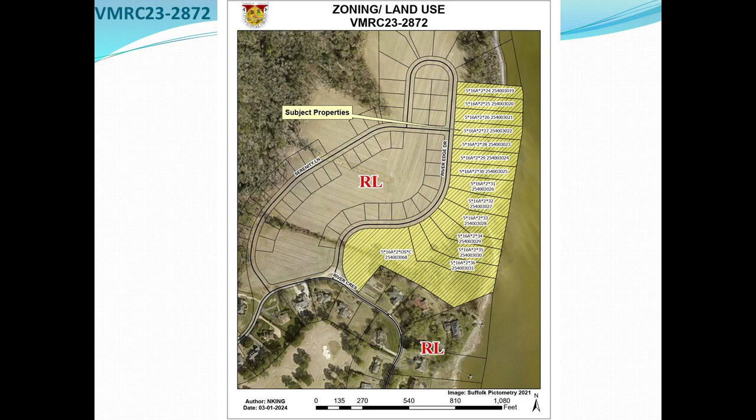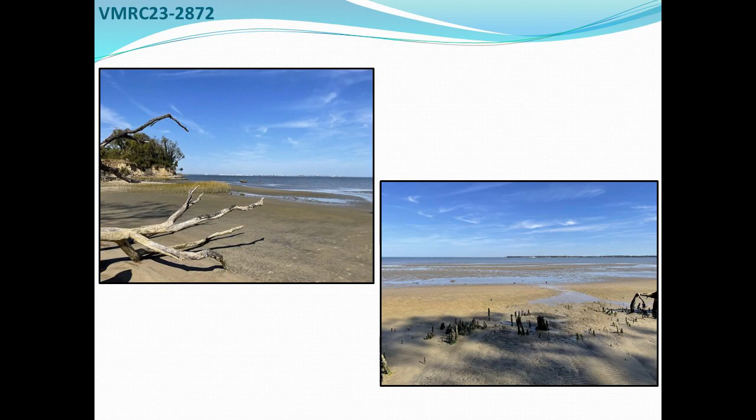The revetment is proposed along the bottom of the bank for 960 linear feet. That revetment is proposed to be there during those hurricane events when a lot of that wave action kind of breaks over those breakwaters and makes it past that, especially during high tide within this area.

Then if you go landward toward the top of the bank, the slope is going to be 3 to 1. That consists of the 100-foot RPA buffer, which is not within this local board's jurisdiction, but the applicant did include that information just to kind of get a general scope of the project. But that will be reestablished fully in accordance with those regulations.

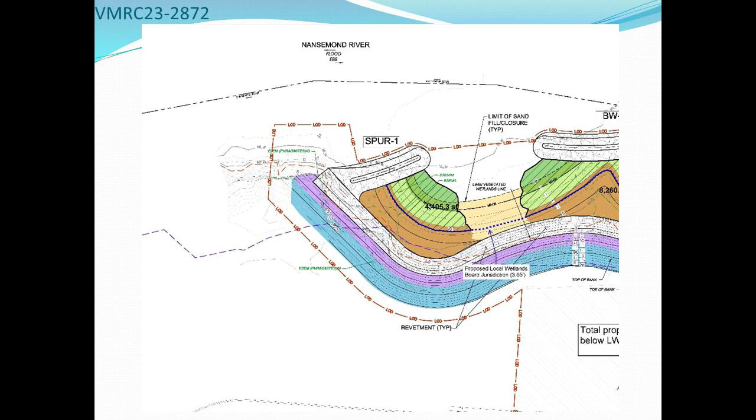Here's another close-up. The construction access is going to be located across 3 of the parcels located in the middle. They are going to get the equipment down there to place the majority of the fill.

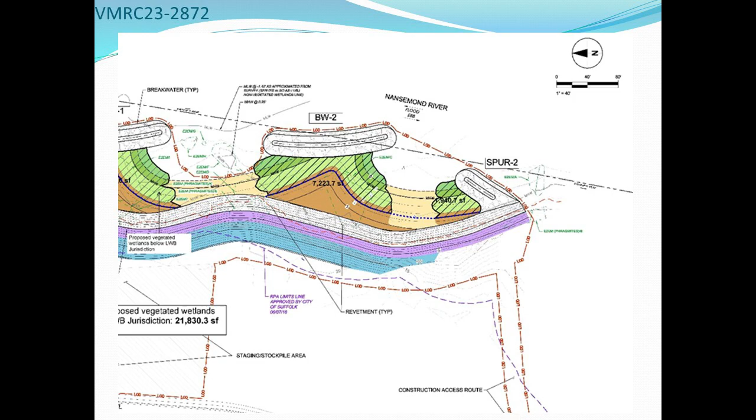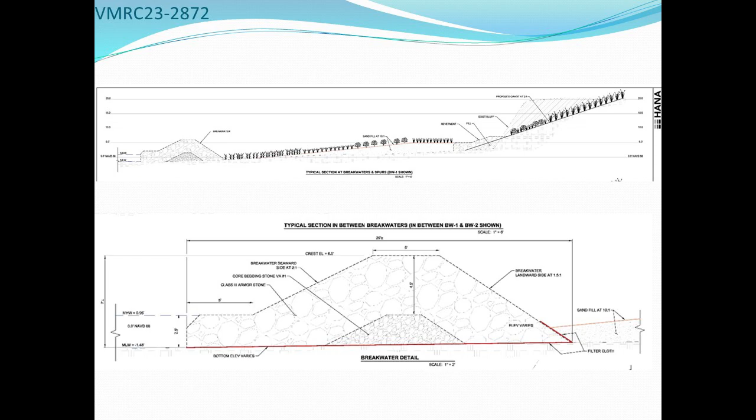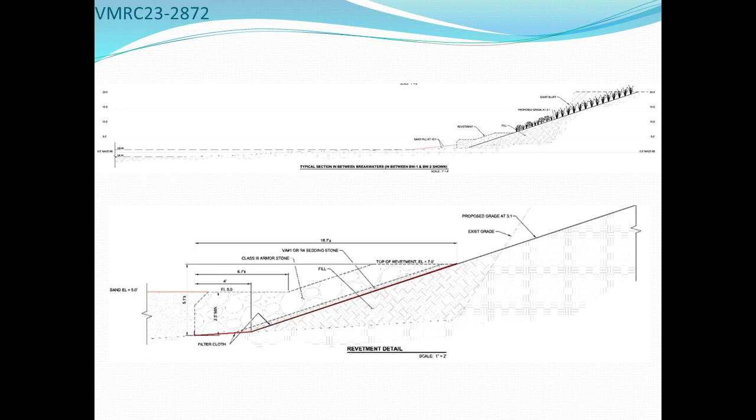And then here are some close-ups of the breakwaters and spurs themselves. They are going to be approximately 6 feet in height. So you can kind of see what that side view would be with the breakwater and then the living shoreline behind it. And here's some additional information related to the revetment.

Like I said, it's just going to be at the base of the bank. Ultimately, staff has reviewed the application and finds that it's appropriate for this specific location given the high wave energy and erosion experienced at this bank. Therefore, staff recommends approval of VMRC 2023-2872 with the conditions listed below, which include ensuring they receive all proper permitting from the Army Corps of Engineers prior to any land disturbance, obtaining a land disturbance permit, and getting approval as it relates to the Chesapeake Bay Preservation Area.

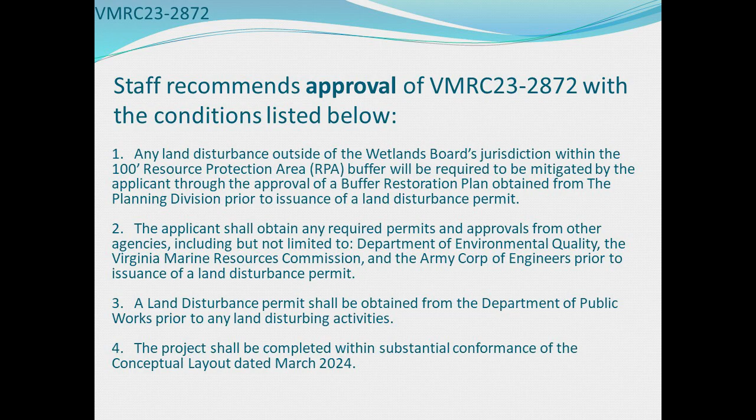And that concludes my overview. If you have any questions.

I was digging through here to look for the schedule. Is there one listed in here? Yes, so we do have a schedule. All of the work should be completed by November of this year. I believe that's related to grant funding, but the applicant can get into greater details related to that.

Okay. So we're going to be done by...

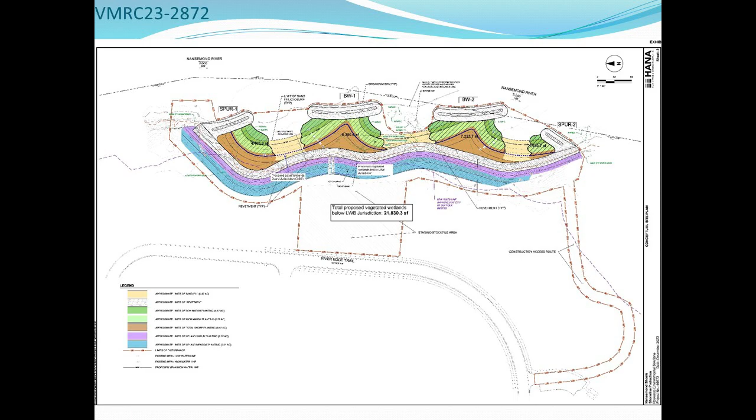Just for my knowledge, or common knowledge, the rest of that site, when I looked at it the first time this permit came, they were going to go all the way around the corner there. What does that look like along that creek? Are those banks stable in there? As you go around the corner, was that Bleakhorn Creek? Yeah, where all the forest is. I went back there 2 or 3 years ago and looked at all that, but I didn't go this particular time because it wasn't part of this project. I was just interested in it.

Yes, sir, thank you. There is erosion on the northern end of the development. It's not as extreme as the project area we looked at, and it's also in proximity to the bald eagle's nest, which presented a permitting challenge for us. So we didn't pursue that portion.

And the other thing, while you're up there, while I was doing the site visit with you, you mentioned that this whole thing was going to be put into an easement. That's right. Could you explain a little bit of that to us, or maybe provide me with the statute for Virginia so I can have that on hand myself? As I said, we are developing this project as...

for TMDL nutrient credits. Primarily it will be a retail bank for us, so we'll develop the credits and then sell them to an end user. So a developer developing somewhere else within the watershed, if they can't mitigate on-site, has to purchase nutrient credits off-site. So to establish that bank, we place a deed of restrictions on the property, which exists in perpetuity.